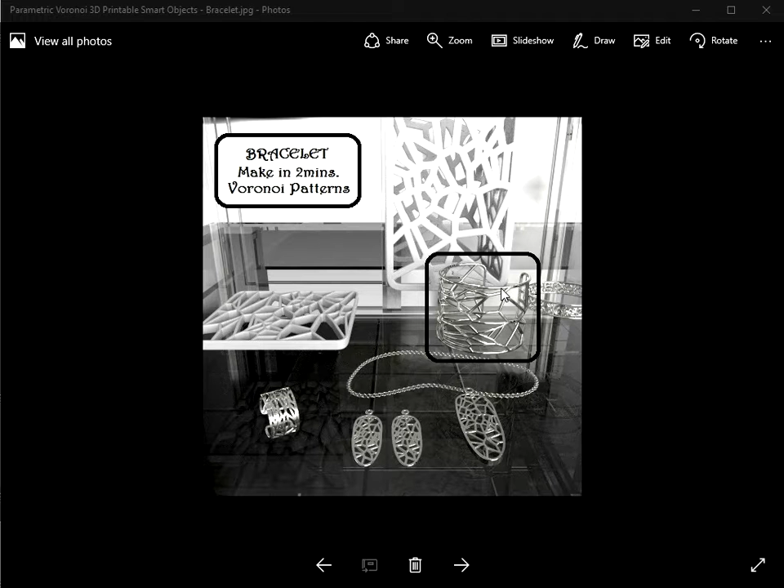Hello there. This video I'm going to show you how you can use Voronoi patterns to make this bracelet in just a couple of minutes using Fluid Designer for 3D printing. So it's patterns Voronoi that I'm going to use, and I'm going to actually use this Inkscape Voronoi pattern 002. And what I'm going to do is I'm going to create a bracelet.

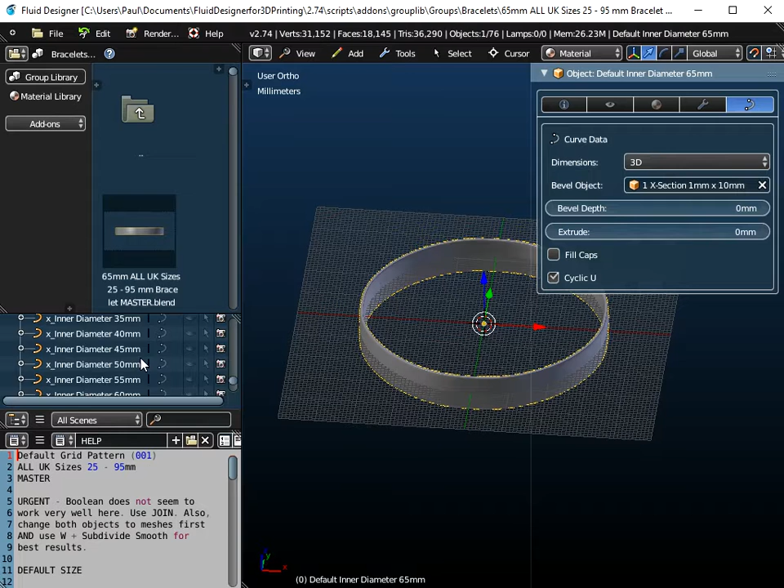So if I go to the bracelets folder and just drag and drop the default basic bracelet item there, you can see that the inner diameter of this is 65 millimeters. I could choose other diameters, but I'll stick to 65 millimeters. Now what I want to do is to remove the bevel object, remove the thickness from that one, because I'm not going to use that.

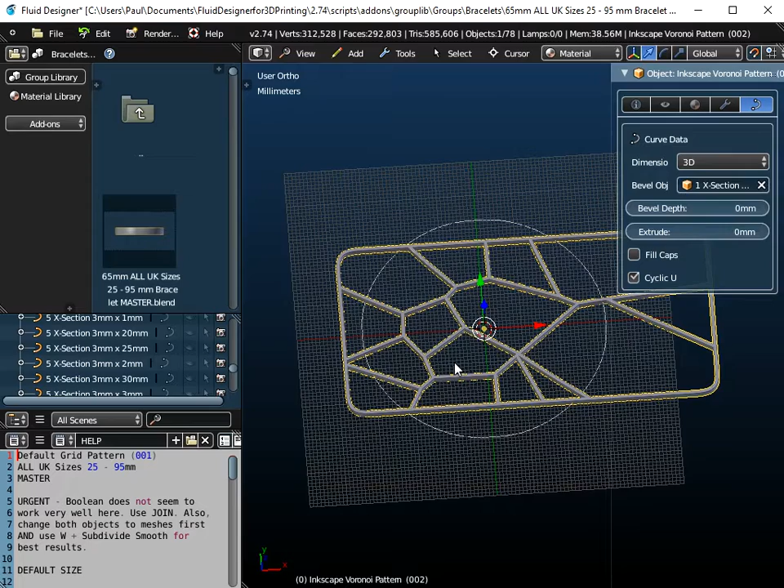And I need to now append, and I just go through the menu system until I get to the groups folder, and I want to append a Voronoi pattern, and it's Voronoi pattern 002, and it's the object that I want to append. So that's the Voronoi pattern that I'm going to use. And first of all I need to rotate this about the x-axis 90 degrees so that it's at right angles to my 65 millimeter object there, which is what I'm going to wrap it around.

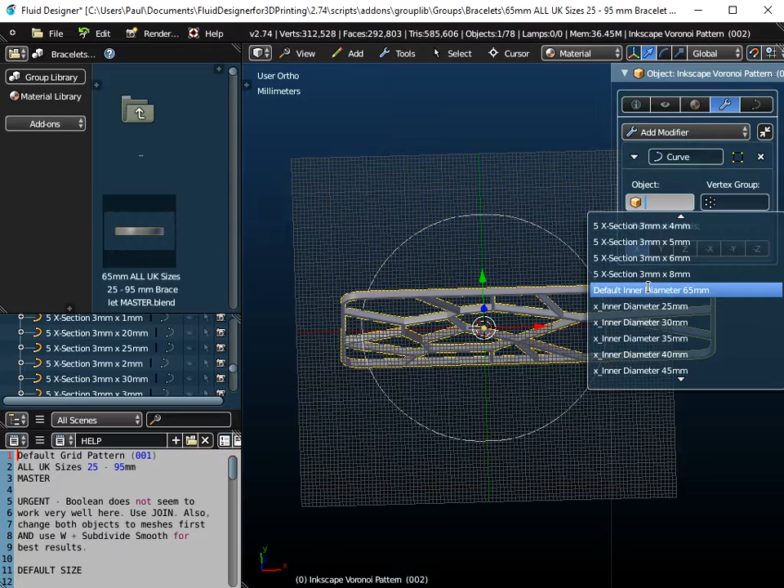And then I just go to modifiers and go to curve modifier, and I just look for my default bracelet object here. There are other sizes that I could use, but I'm using the default inner diameter. So it's that object there, the default inner diameter of 65 millimeters, that I'm going to wrap it around. And as you can see, it's a little bit too short at the moment.

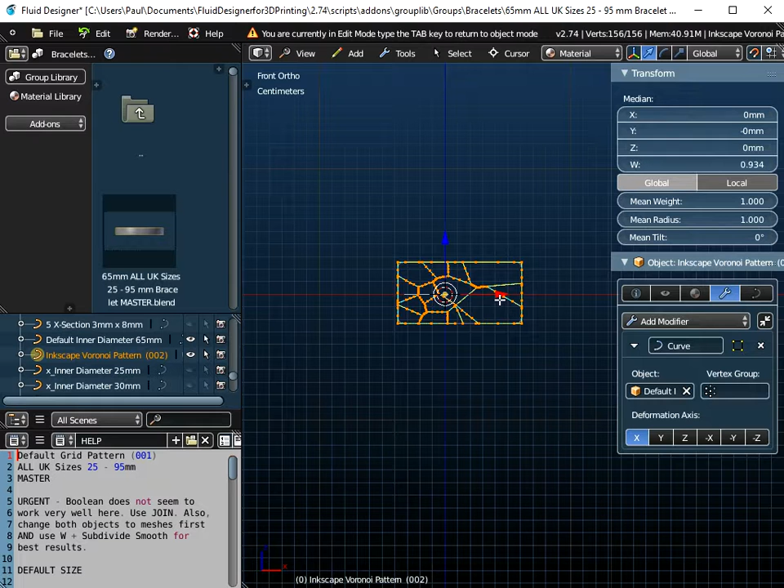So if I just go to view and front, and if I just go to edit mode and press A on the keyboard to highlight all the control points, and I want to stretch it out in the X direction. So I do S to scale and X to limit my scaling to the X direction. And if I just drag that out now and then press the tab key, you can see I've scaled it a little bit too far.

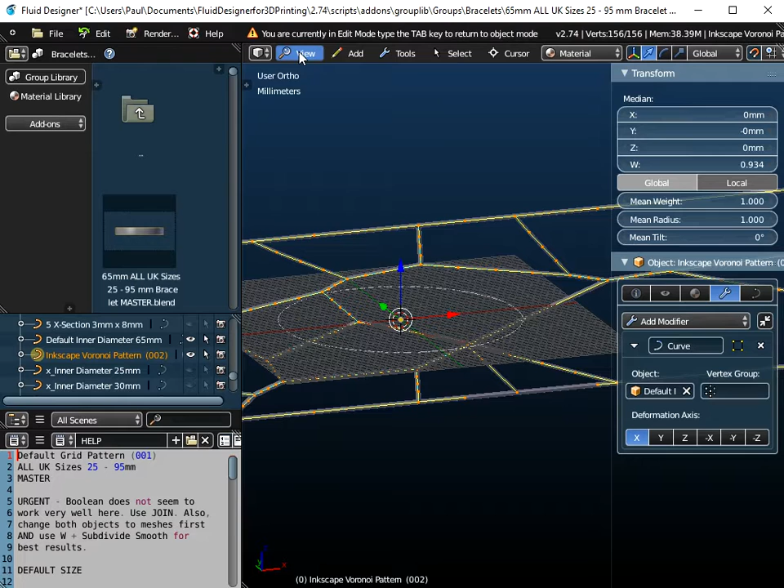Now I need to do Control A and apply that scale. Whenever you scale in Fluid Designer, you must always do that. So I want to scale it in a bit. So view and front. So I want S for scale, X, and I just want to bring it inwards a little bit now. And then press the tab key, and always remember to do Control A and apply the scale.

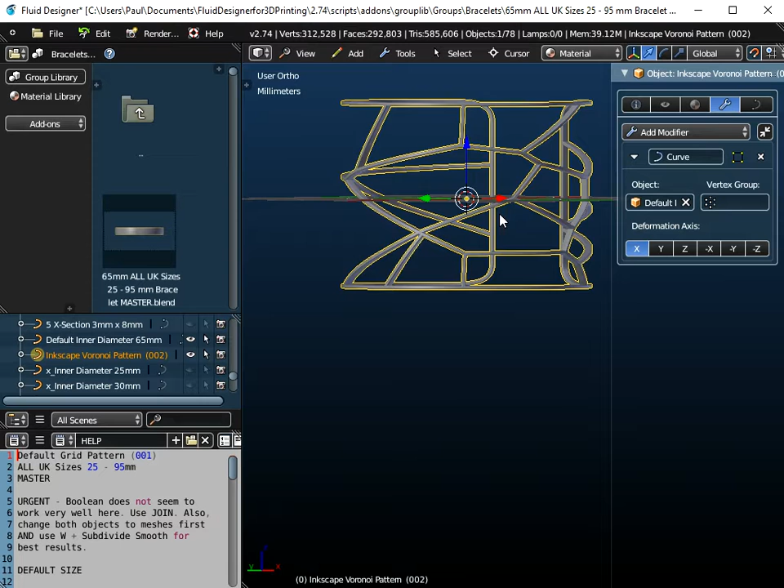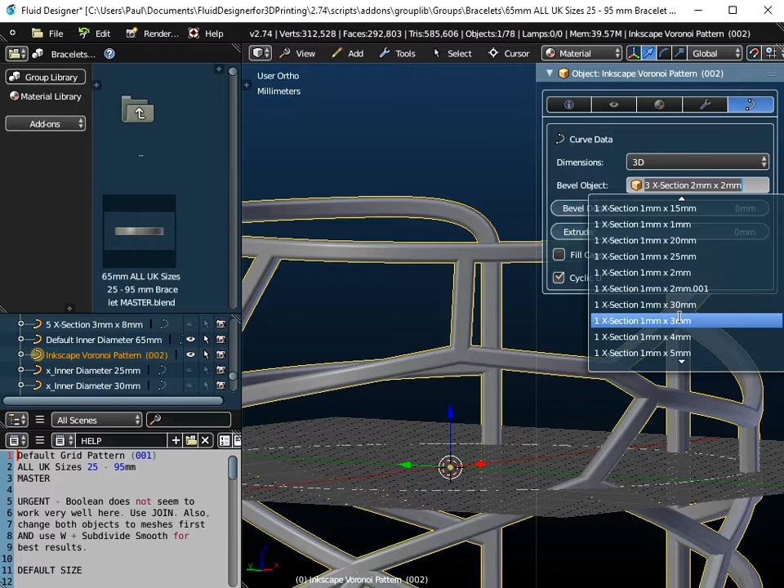And there it is. I've wrapped it around that 65 millimeter object now, and because this is a parametric smart object, if I actually wanted to change the thickness of this, I can just go to bevel object here, and I could change it to let's say 2 millimeters by 2, so you can see that that thickens it up. Or I could go to 1 millimeter by 3. So you can change it afterwards to any size you want.

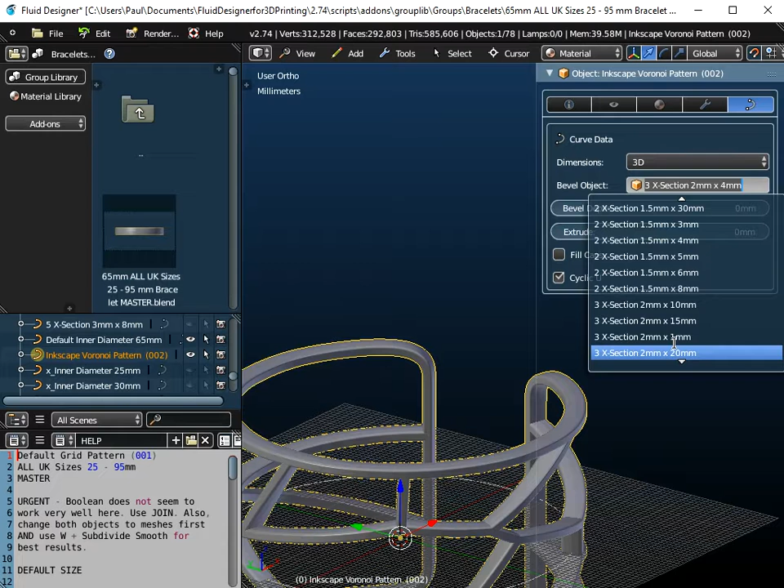Now if I go 2 by 10, it's going to look really strange. So I probably want just something like 2 by 2 or 2 by 4 perhaps. Yeah, no, 2 by 4, that's not the right one. I'll go to 2 by 2. Should have checked this before I did it. Yep. So that's essentially, because it's a parametric object, you can change the shape of it afterwards.

Now the only thing to be concerned about is that the bracelet is wrapped around the middle of the curve at the moment. So that means that this inner diameter, if I just measure it, is slightly below 65 millimeters. So you can see it's 63 millimeters, so there's an extra 1 millimeter on either side missing.

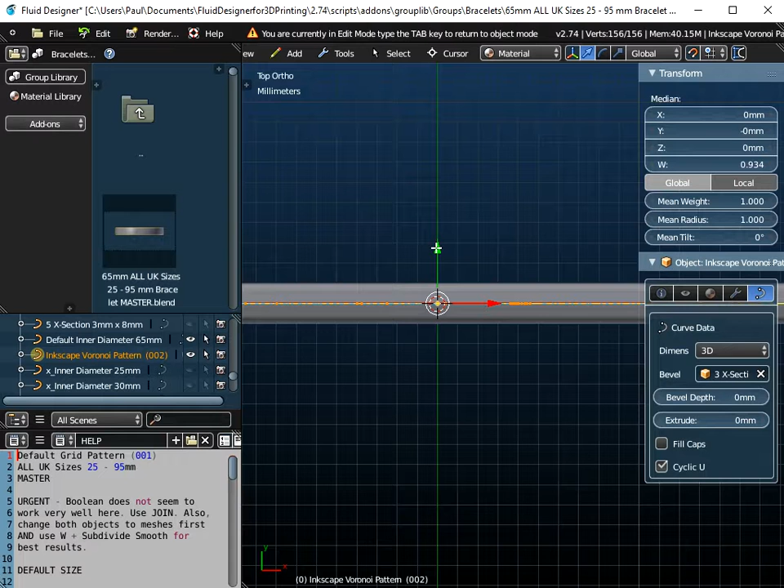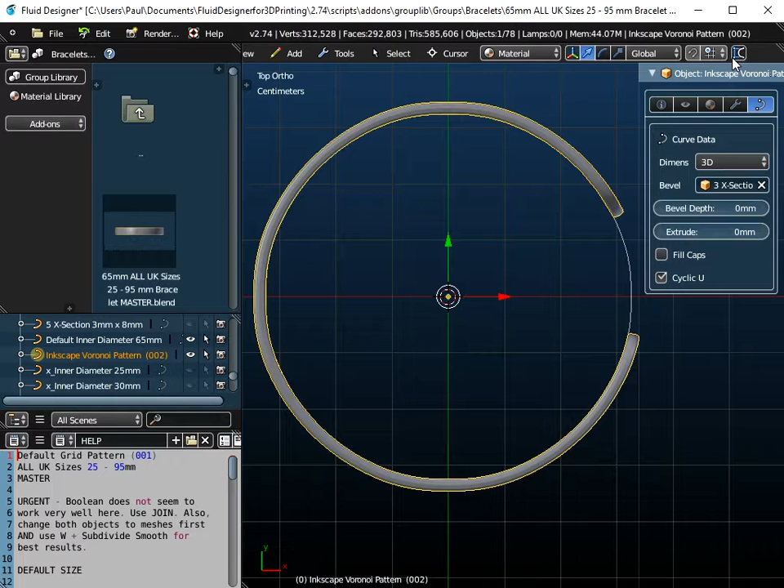If you actually want to sort that out, you can always go in here and usually if you just move up this so that the bottom of it just touches the x-axis, you should find that it's on the inside now. So our inner diameter is now, well, let me just go to view and top view. Our inner diameter now, if we measure it, should be 65 millimeters. So if you want to be accurate about that, you just need to make that change at the end.

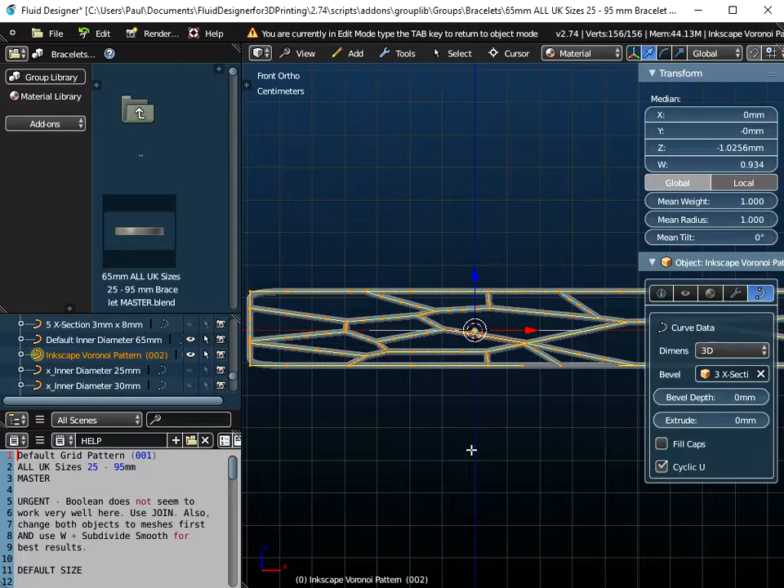If you wanted to slim this down, you could do that. You could go to view and front view, go to tab, and if we scale it in the Z direction, and remember to do Control A and apply the scale, we could have a thinner bracelet there as well.

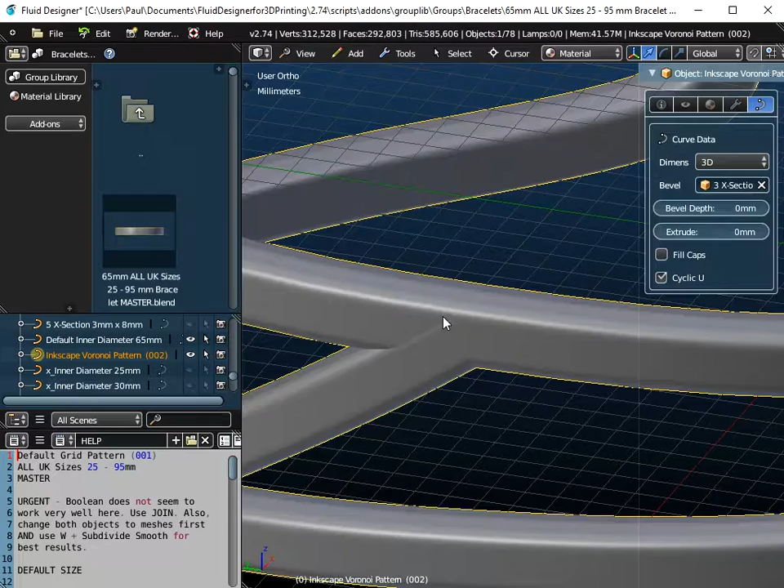So that's essentially how you can create this sort of Voronoi bracelet in Fluid Designer for 3D printing using Voronoi patterns. I should also say that you do really need to zoom in on this and just double check that everywhere fits okay. Don't just try sending this straight to be 3D printed. You do need to just double check that everything's okay there, nothing's pulled out. But that's it essentially. That's how easy it is to make your own Voronoi bracelet.